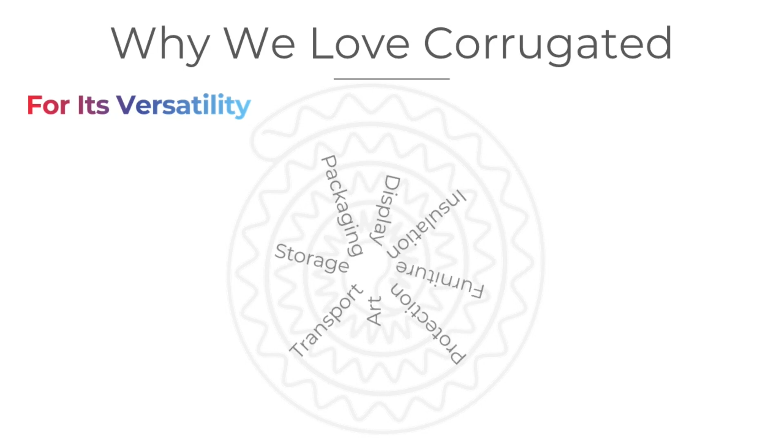Let's start by looking at some of the unique qualities of corrugated board. What makes it so special? Corrugated board is one of the most versatile materials. It is used for packaging, transportation, insulation, even furniture and art.

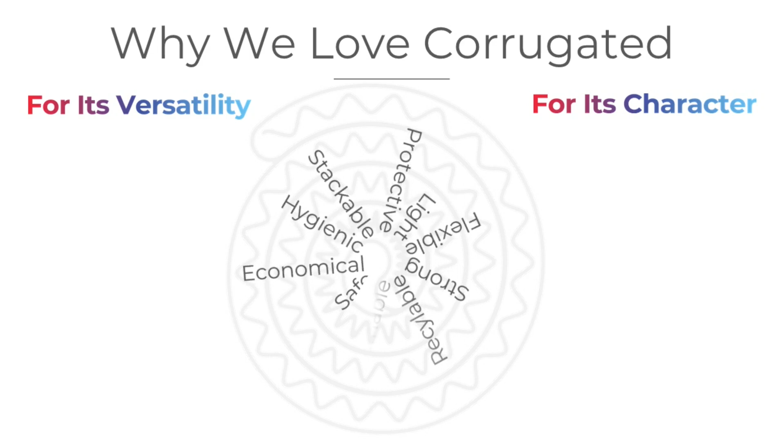But in recent years, it became clear that corrugated has even more to offer. It is excellent for keeping food fresh. Plus, it can be recycled up to 25 times. This makes it one of the most sustainable and popular packaging materials.

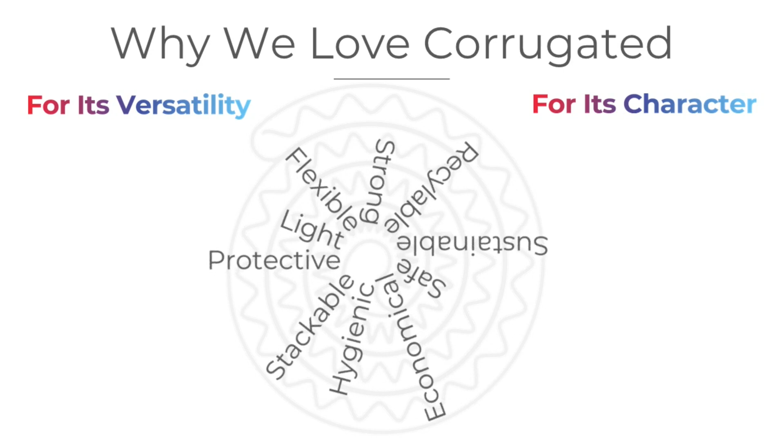But we all know the saying, every rose has its thorn. And so it is with corrugated board. There is a downside to all those beautiful qualities, and that is contamination in the form of dust and fibers. Of course, we know that this is due to the nature of the substrate, its structure, and the way it is made. But does this mean we should accept contamination as a normal byproduct of corrugated board production?

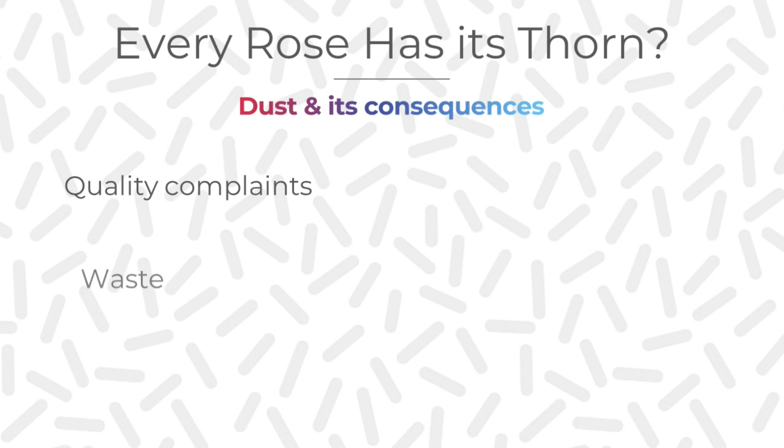No. Because dust and microparticles are enemies of your products. They threaten your substrate's quality, your health, and your expensive equipment. Moreover, dust is the main reason for poor printing results, whether flexo or digital printing.

That is why companies that are aware of dust problems use detection and quality control systems, so they can remove inferior products before they reach the customer. This avoids costly quality complaints, but it does not clear the air of dust. And remember, rejected products are just as expensive to produce as perfect copies.

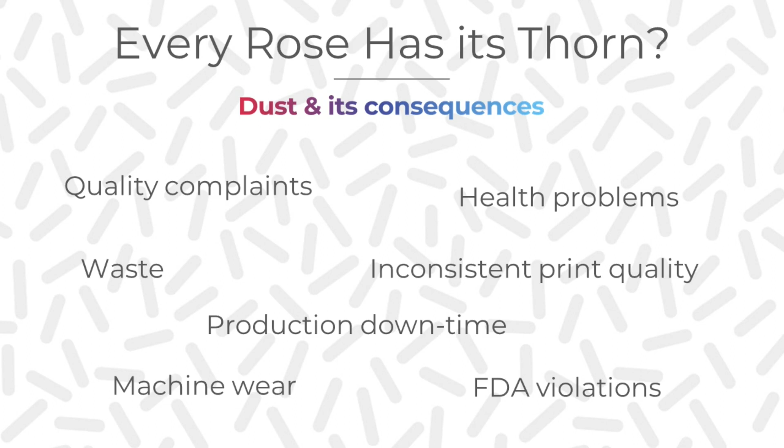With the increased need for clean production and high-quality corrugated board, today's manufacturers and converters realize that effective dust removal is key to avoid waste and consistently produce good, print-optimized board. In fact, it changed dust elimination solutions from nice to have to essential.

But what to look out for when you research an effective dust elimination method? One that meets your production needs, and rewards you with optimal, trouble-free output? And don't forget what you need to avoid, because solutions that trade contamination for new problems are not what you need.

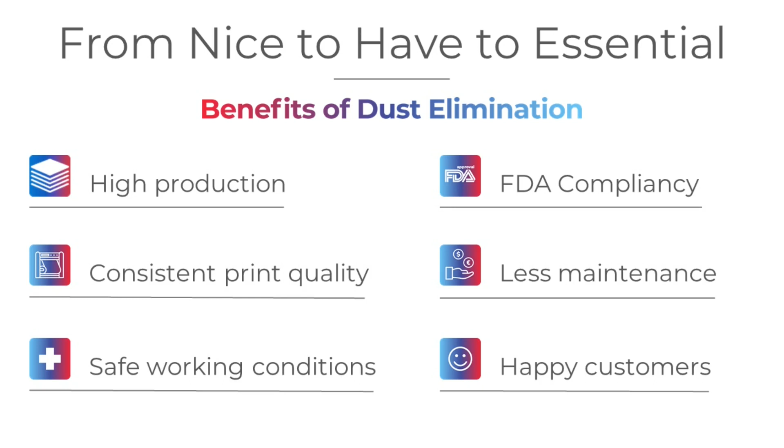To help you research available dust removal systems, we have created a checklist of quality requirements. Let's look at these demands first. Or, what should your dust removal system result in?

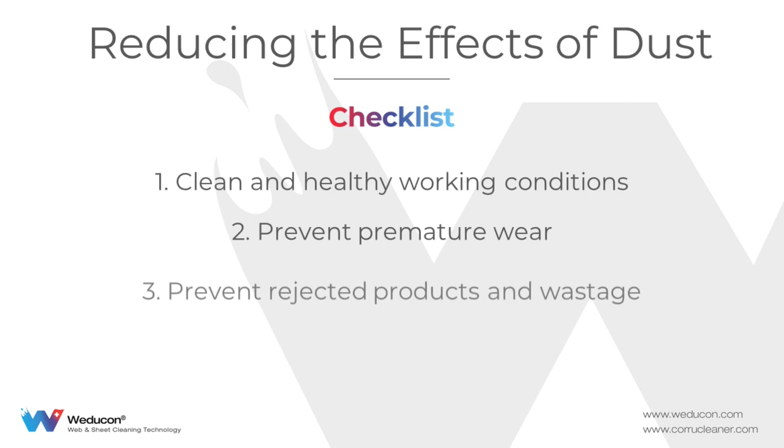First, it needs to guarantee clean and healthy working conditions. Second, it should protect costly equipment from premature wear caused by abrasive particles. Third, it needs to prevent wastage and rejected products. And fourth, it enables you to produce noticeable clean and safe materials that are ready for printing. So, no complaints anymore.

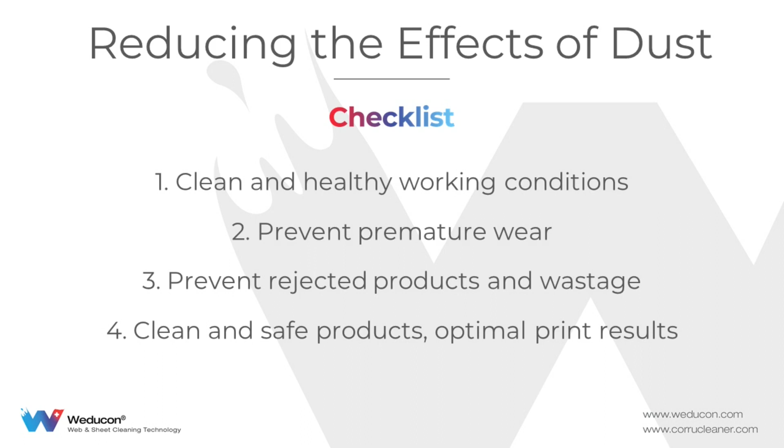But equally crucial is that the cleaning method you choose does not create new problems. What problems do we mean? Let's look at some scenarios. To begin with the substrate: is the cleaning method appropriate for the substrate and processing? Will it not damage the surface and make it unsuitable for printing or further converting?

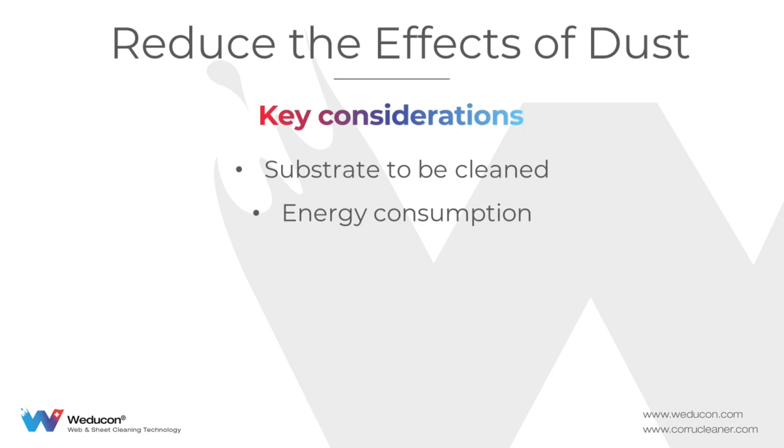Another issue: energy consumption. How much energy does a cleaning method consume? Don't think of just the electricity, but also consider compressed air. It is often used for cleaning, but it is the most expensive energy there is.

Carefully consider the dust extraction technique. Essential for effective results is preventing recontamination. By this, we mean that extracted particles return elsewhere in your production environment. Unfortunately, this happens more often than you think. The causes may be outdated technology, poor adjustment, cleaning in the wrong process stage, or simply using a method that is not suitable for the production environment and demands.

Then there are issues related to profit, health, and sustainability. Are there any spare parts or consumables needed? If possible, you want to avoid recurring costs and waste that is caused by hard-to-recycle consumables.

Equally important are maintenance requirements. Maintenance causes extra production stops and puts additional strain on your workers, something you might want to avoid. And last but not least, how about noise levels? It is essential to minimize noise exposure because it causes stress and health issues.

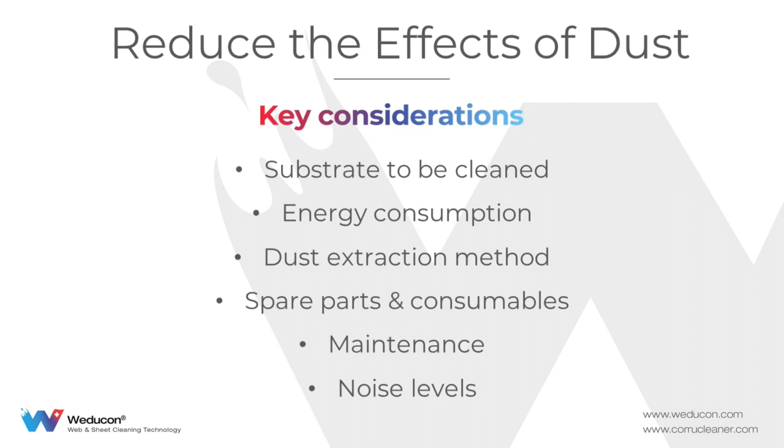So far for the checklist of essential requirements. As we mentioned, other factors for effective dust elimination include the production stages where you apply cleaning. For example, some choose a single-sided cleaner, a perfect solution for cleaning the printable side of the sheets before feeding them into the press.

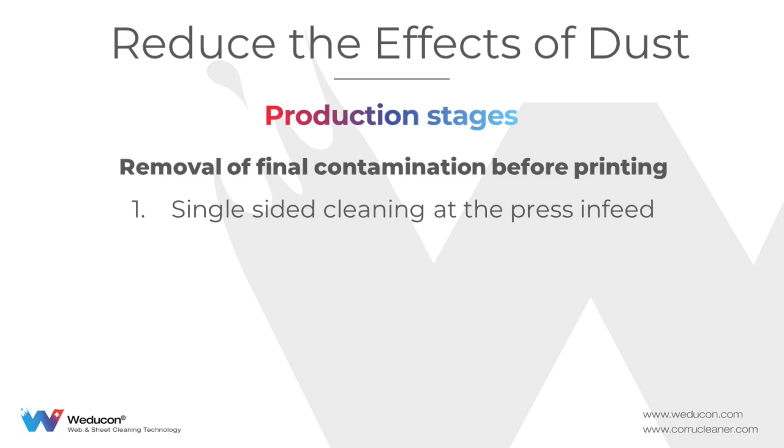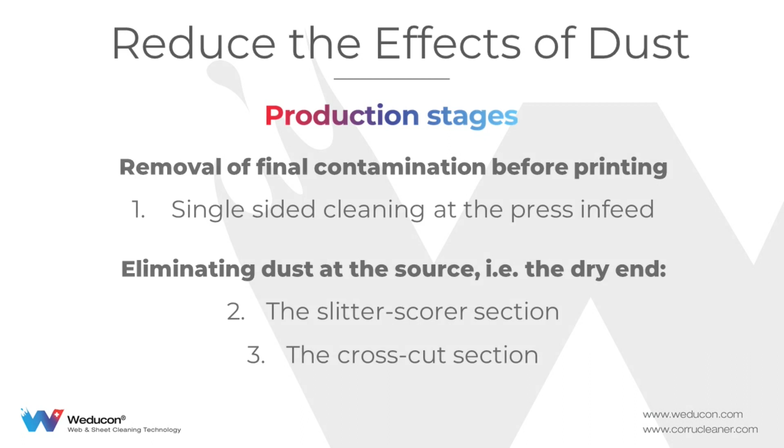And if carried out well, a protection against contaminated ink and print defects like hickeys, bullseyes, etc. But also consider the vast amounts of dust and fibers released from the corrugator's dry end, spreading throughout your facility. For maximum results, remove the dust as close to the source as possible, which are the slitter scorer section and the crosscut section. Investigate what solutions are available here, and finally, how they fit in with your existing equipment.

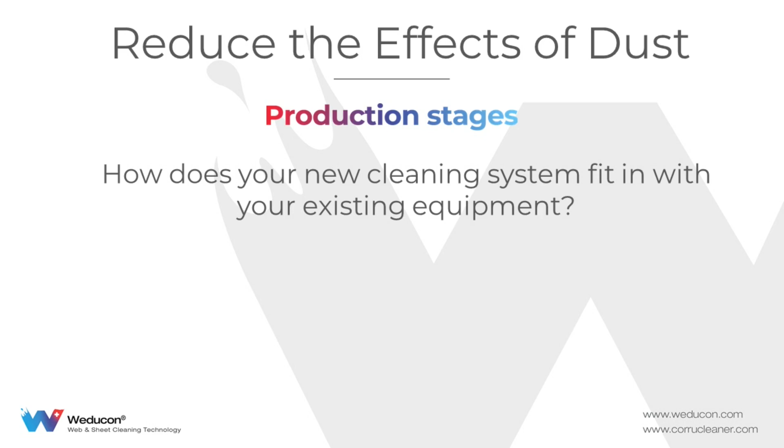This was just a brief summary of how to optimize your production and quality, and what points to look out for when choosing a cleaning system.